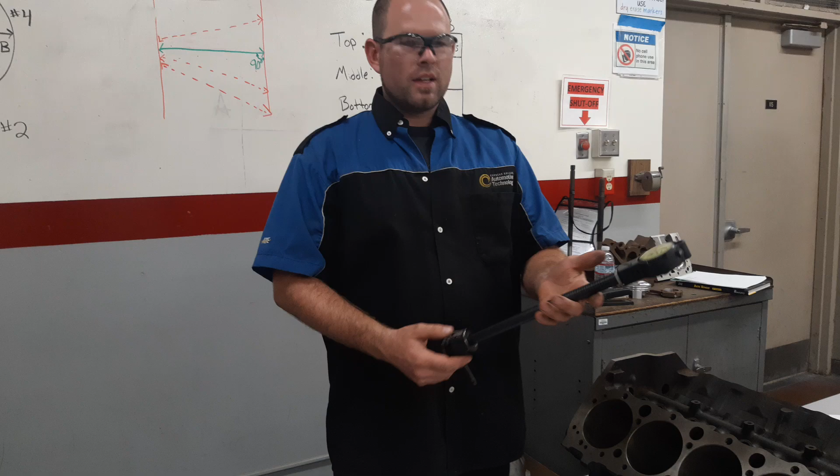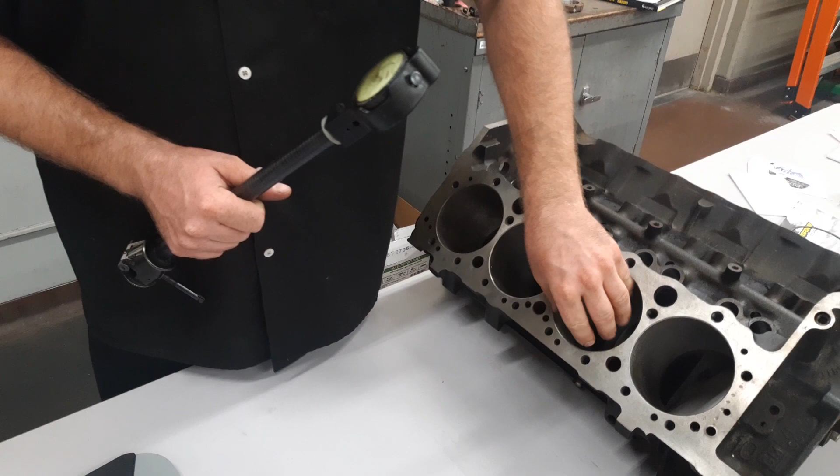Okay, we're going to cover how to use a dial bore gauge today, and not only how to use this, but also how you can use it to measure cylinder out of round, cylinder taper, and measure a few different things. So first thing is, this is kind of, I wouldn't say very complicated, but it's a little bit tricky to learn to use this. So there's a few things we should check out first.

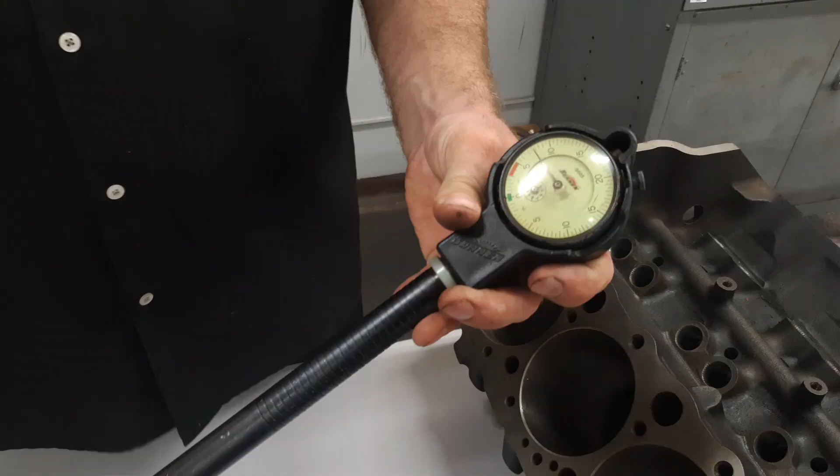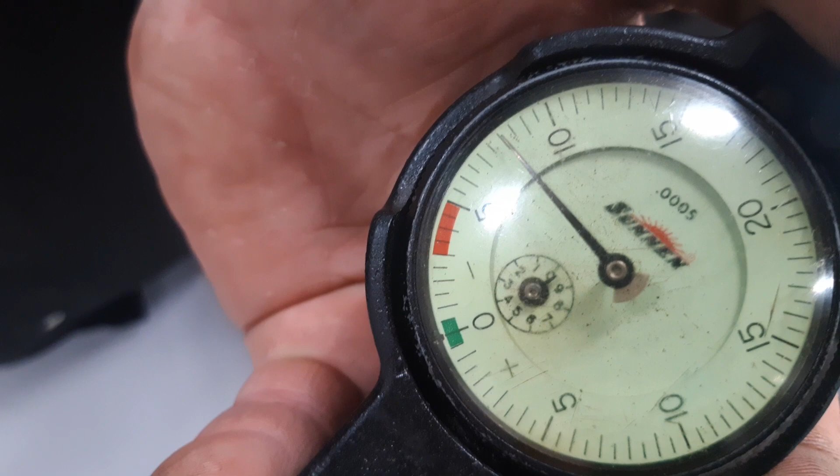The first thing is, if you watch my hand here, as I squeeze this, note that it's moving this gauge just like a dial indicator. The next thing is, if we zoom right in on the screen, you'll notice it says 0.0005. Each one of these small little lines here, I'm trying to move just one, it's very difficult. Each one of those lines is actually a half of a thousandth. So a full thousandth is going to be like the movement of two lines. It's so small I can barely even try to move like 3 or 4 lines, but just know each line is half a thousandth.

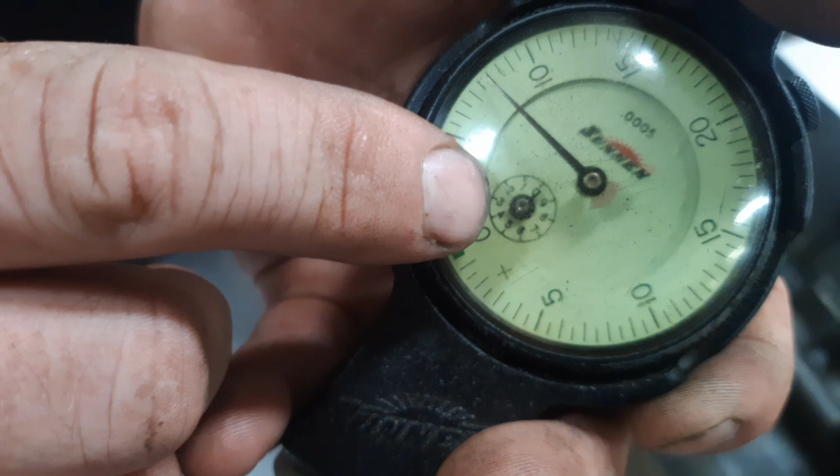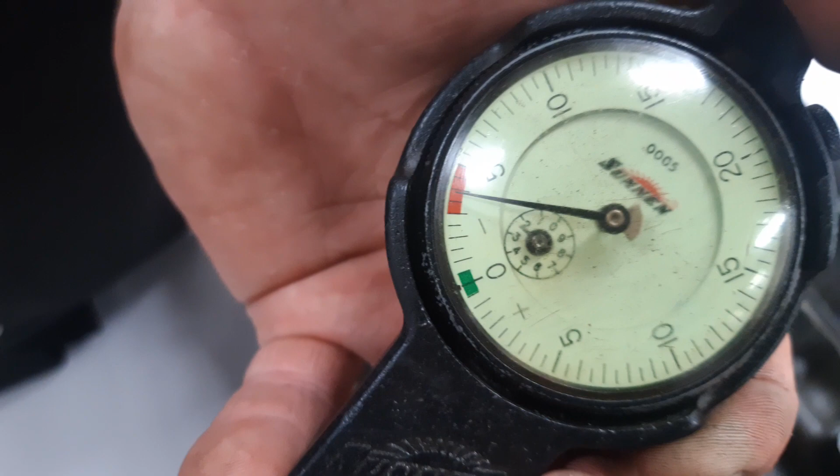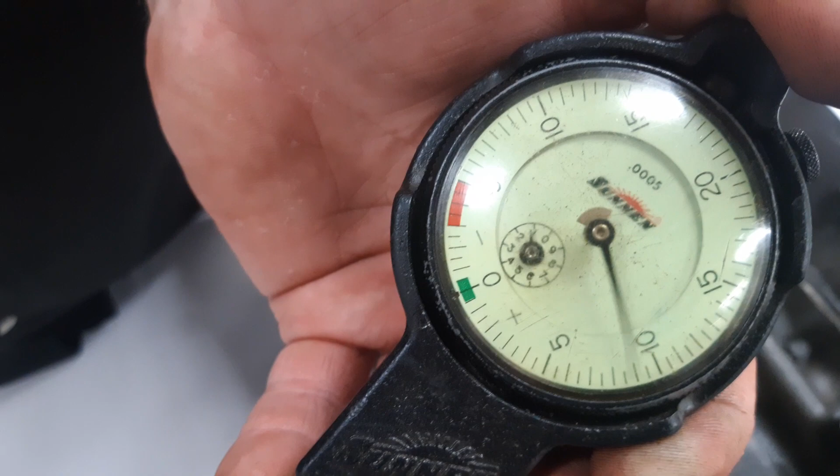The other thing to point out is this small little circle gauge here. Note that as it goes a full lap, it crosses 1. If I do another one, it'll cross 2. And so that helps you make sure that you're pointing to the right numbers, and you're not thinking, oh, okay, well, it's 0, but in reality, it's actually gone a full loop around. It's not really at 0 anymore. That's kind of like 0 plus a full rotation. So hopefully that makes sense.

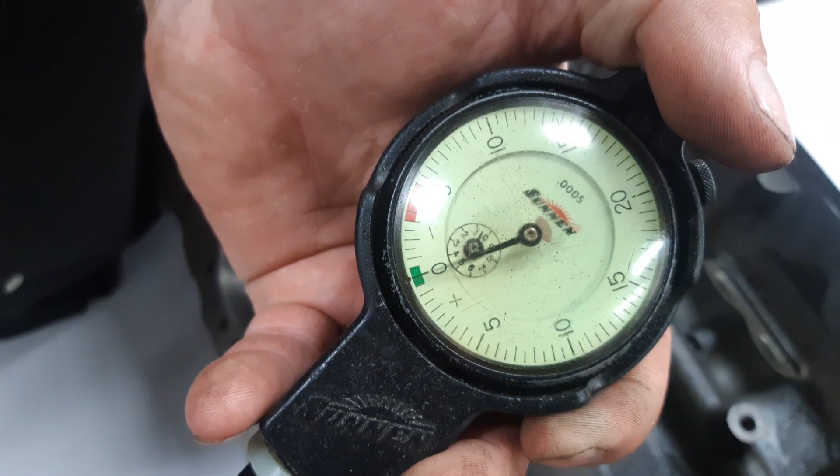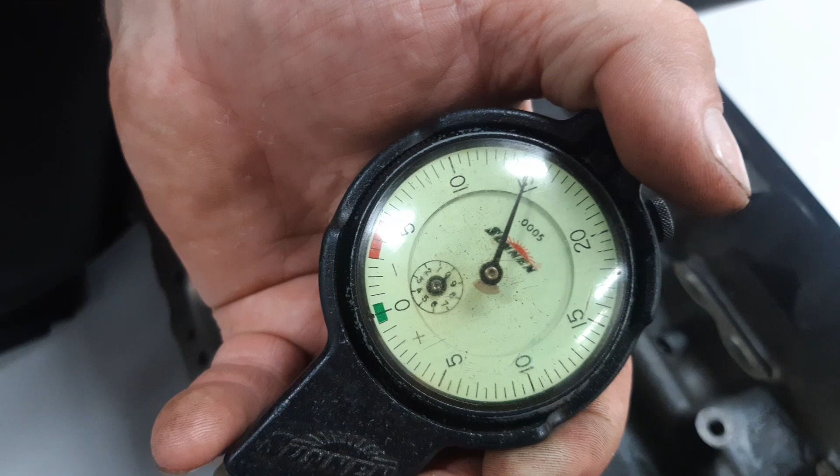The next thing is, if you're starting at 0 here, as the needle goes this way, the more it turns that way, the smaller the hole is. And the more it turns this way, towards the green, the larger the hole is. So smaller, larger, and you can kind of tell because plus is larger and minus is smaller. So that's just overall how this thing works.

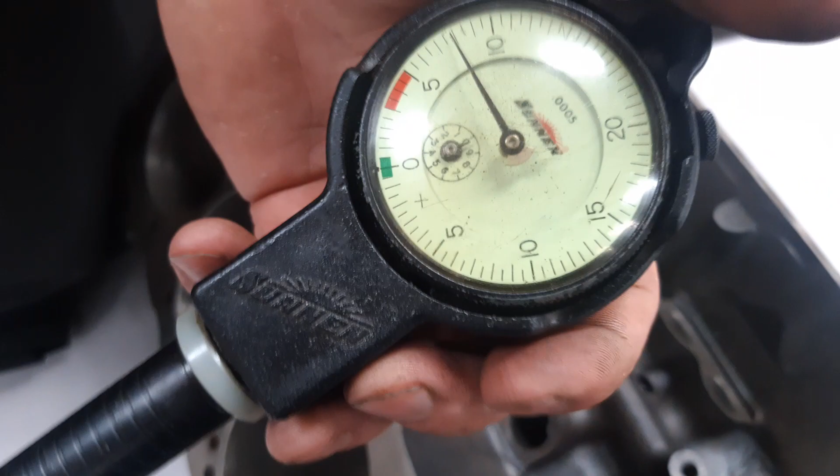The next thing is, you need to set it up to measure a specific cylinder. This cylinder was originally made to be a 4-inch bore, but it's been machined. Several of these have been machined, so they end up somewhere between 30 thousandths and 50 thousandths over. So if you want to know your cylinder size, you can look it up, and they have varying lengths of adapters, and you can do some fine-tuning adjustment on these to get it in range. So go ahead and look it up, and you can put in the right adapter. But what I do is a little bit different.

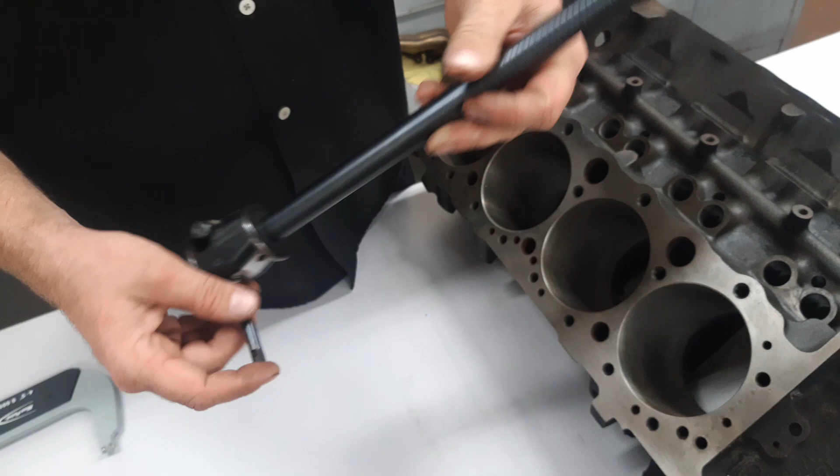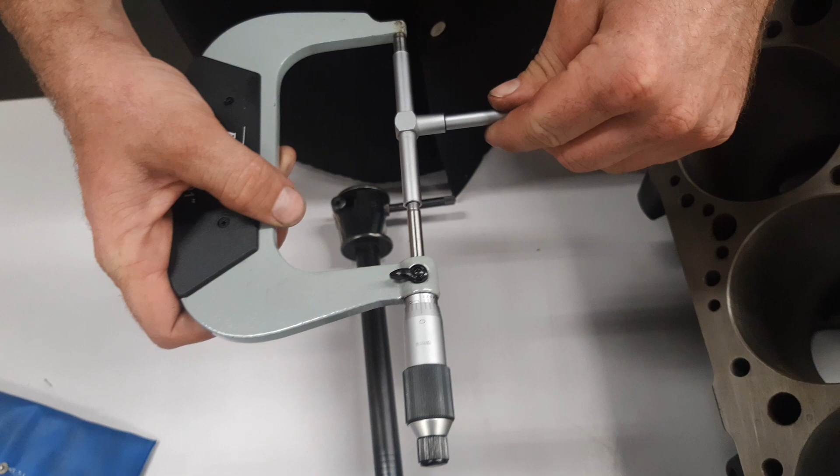I'll take a telescoping gauge just as a quick down and dirty measurement, and I'll go in there and expand it, and make sure I try to get it nice and square in the cylinder. And then from there, I'll measure that with my micrometer, and I'll pretty much know what I've got here. Because I did a down and dirty measurement, I know that my baseline is going to be 4 inches and about 50 thousandths. It should be easier for you if your block has never been machined. You would just be like, oh, it's a 350, it's 4-inch bore. I'm just going to set it up for 4 inches.

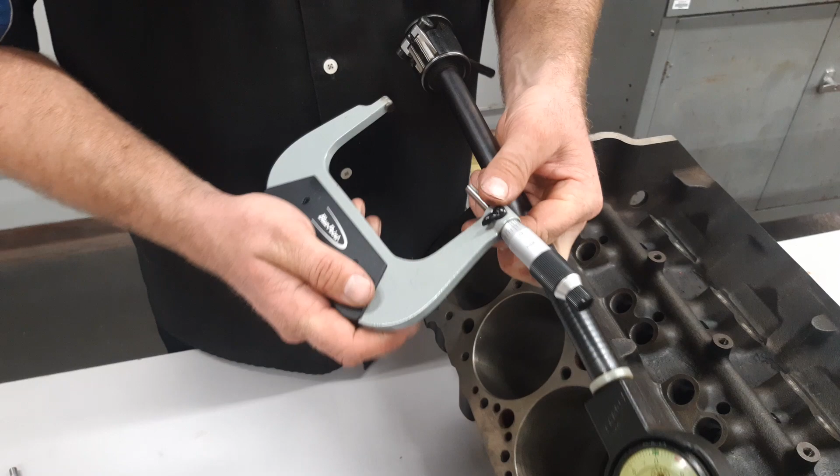What we're going to want to do is take a micrometer, and in my case, I set it to 4 inches and 50 thousandths, as you can see here. I'm exactly at 4 inches and 50 thousandths. Now, this isn't how to measure using a micrometer. I'm assuming that you know that.

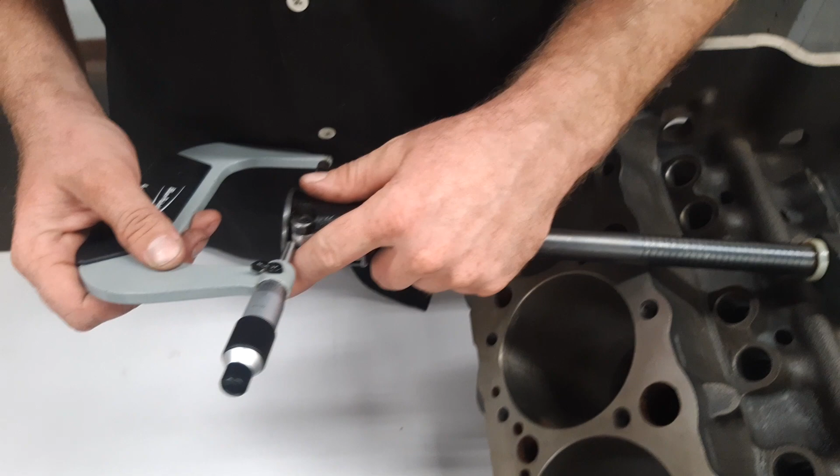But from that point, what I really want to do is lay this dial bore gauge out, and it's kind of tricky. It's really hard to hold, but I'm going to basically put the micrometer on there, and get that needle to read 0 with this set at 4 inches and 50 thousandths. So right there is my baseline. You can see that, and that's just me moving. It's hard to hold it really still. And so what that means is, if I put this in a cylinder and it comes around to exactly that 0 right there, with the small little dial behind it indicating 0, that's where we set it.

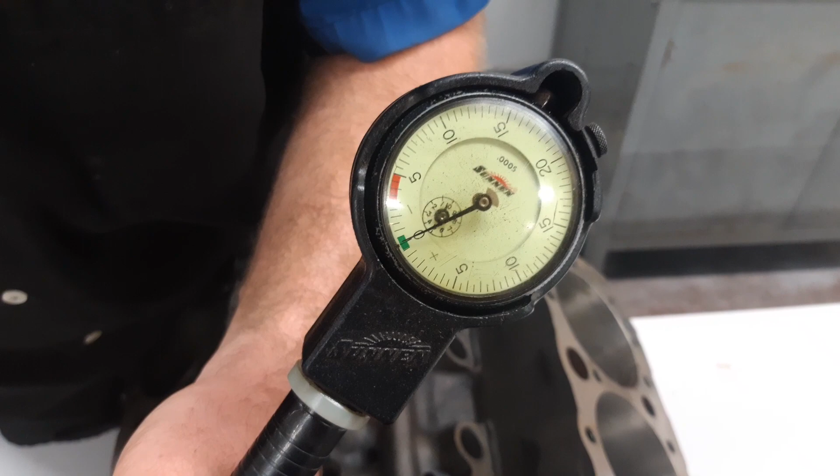If I'm right at that 0, I know that that diameter is 4 inches and 50 thousandths, because that's what I set my micrometer to.

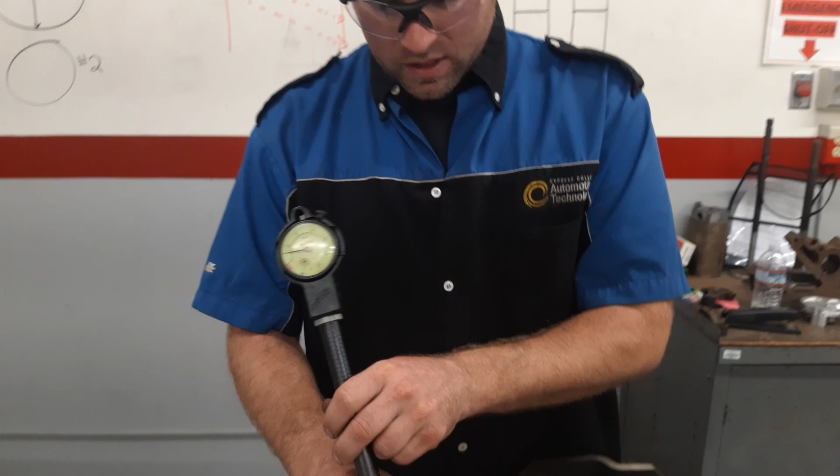Now, when I go in like this, I'm going to go to cylinder 4, and cylinder 4 for me is right here. What I'm going to do is this little sweeping motion, as you can see.

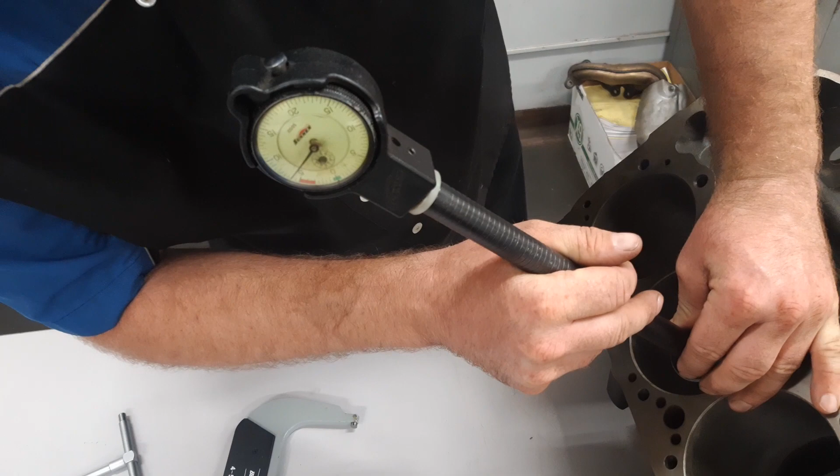Basically what I'm doing is watching that needle, and I'm trying to get that needle as far negative as I can. In this case, it's a little over, really 5.5 thousandths, but I'm going to use 5 just to keep the math simple. So we'll say that's 5 thousandths of an inch.

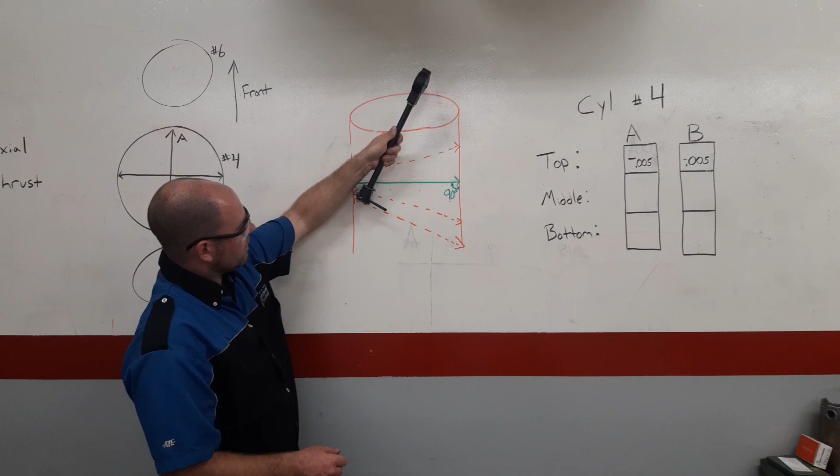You'll notice the further I sweep, it goes kind of back down towards the bigger hole side. The reason we're doing that: I've drawn here, we put this in and start with a sweep, and the more we tip it out of being perfectly square, this line gets longer and longer, showing more and more on the dial indicator towards the green, which is the larger side.

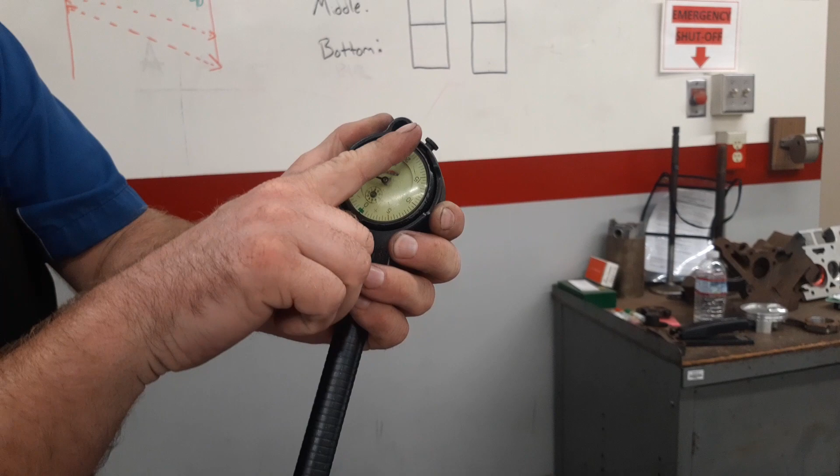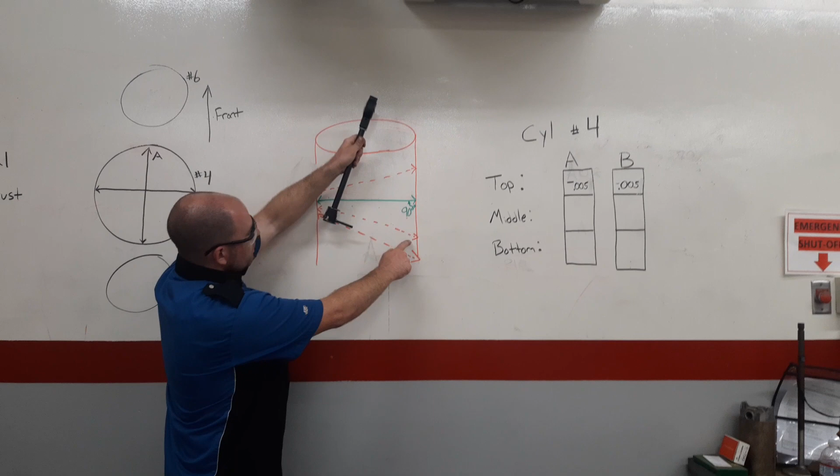So when you start in, it starts way over here, and as you're sweeping it, it gets tighter and tighter, smaller and smaller. As I start sweeping, this line gets a little bit shorter. The shortest the line will ever get is at the true 90, the true perpendicular. That's our real measurement. Once I pass that, you'll notice it starts to get longer and longer again.

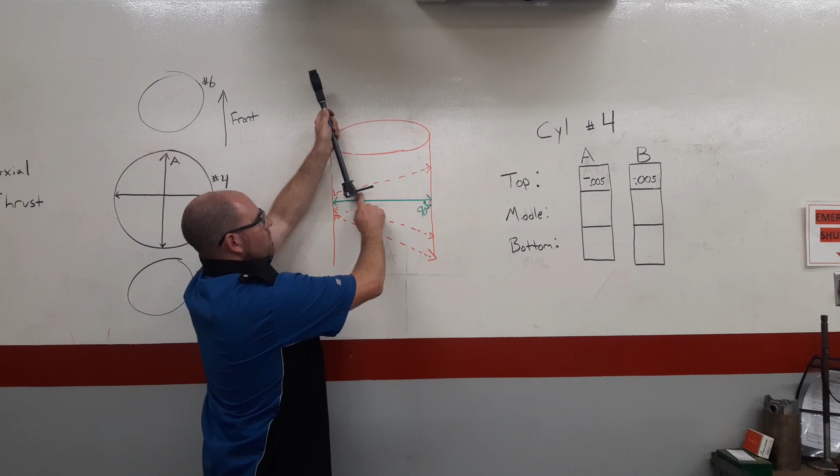Let's see what that really looks like. If I'm in here and I start my sweep, this is showing a really, really big hole. It's getting smaller, smaller, smaller, and then it starts to get larger again. Smaller, smaller, smaller, larger again. So we're just looking for that smallest spot.

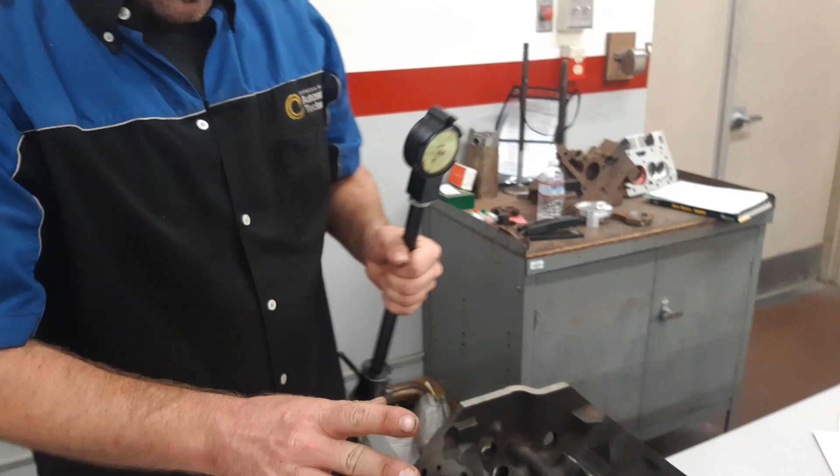For simple math, because we're not going to try to crunch 0.5 thousandths, let's say we've got 5 thousandths of an inch. Now the measurement I just did is in the axial direction.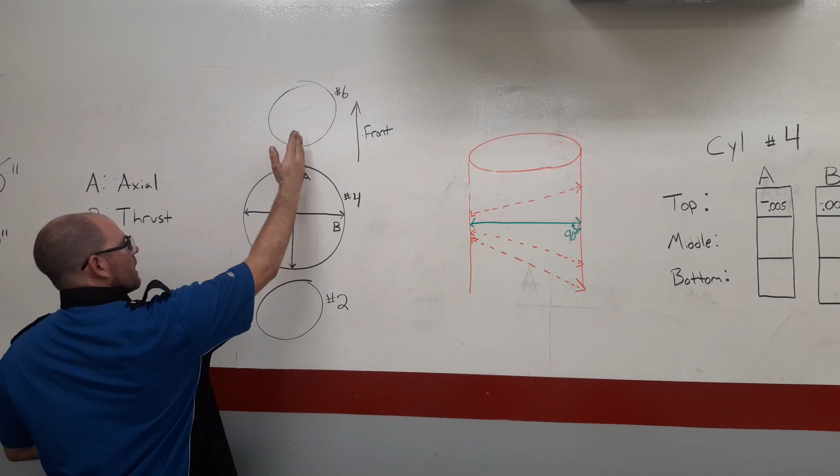Over here I've got cylinder 4 drawn. The axial direction is along with the crankshaft, so I've made that my A dimension. This is my A measurement, it's axial. I've made a little chart here.

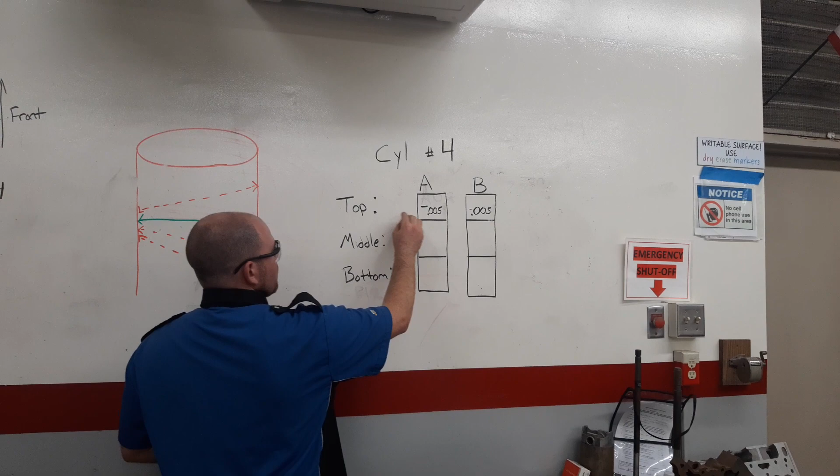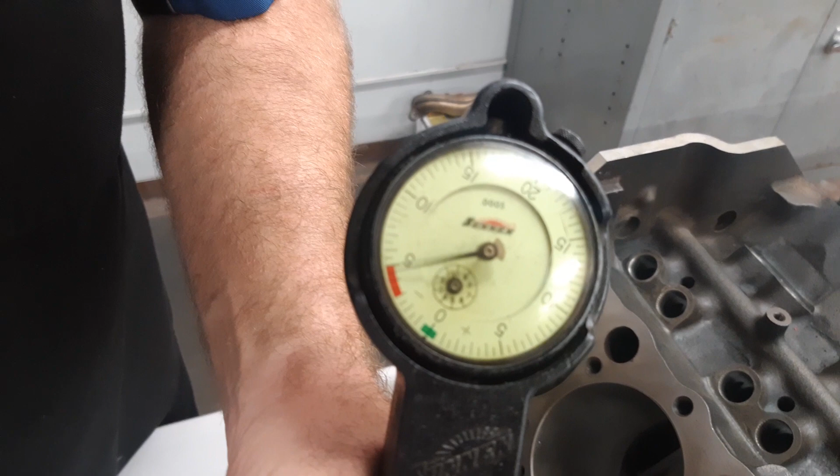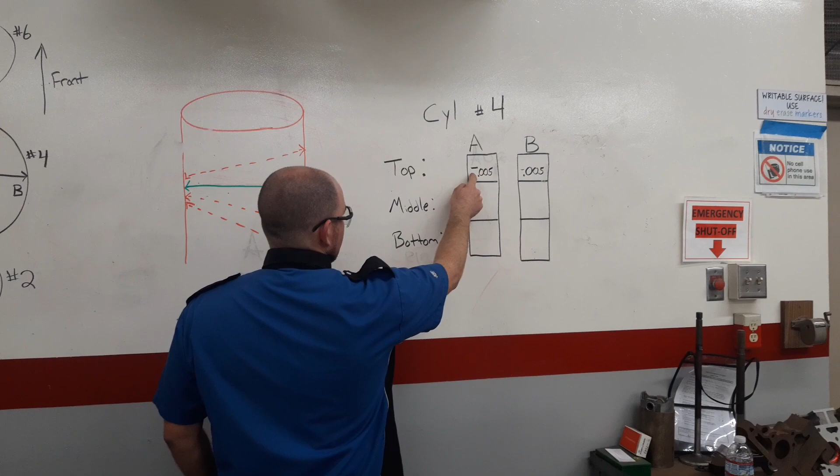We just measured the top of the cylinder, and I'm getting what I consider a negative 5 thousandths of an inch. Why it's negative: if you look here and remember, we were right around there, and that's on the negative side. So what negative means, very simply, is it's a smaller hole. If it's negative, it's a smaller hole. How much smaller? 5 thousandths smaller.

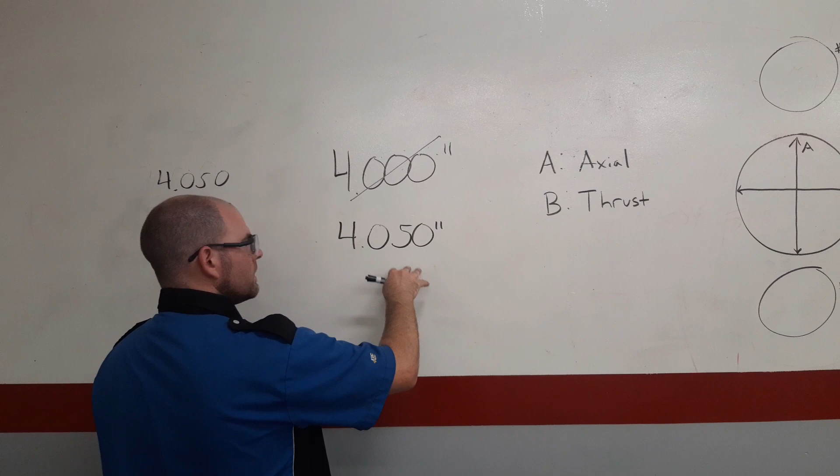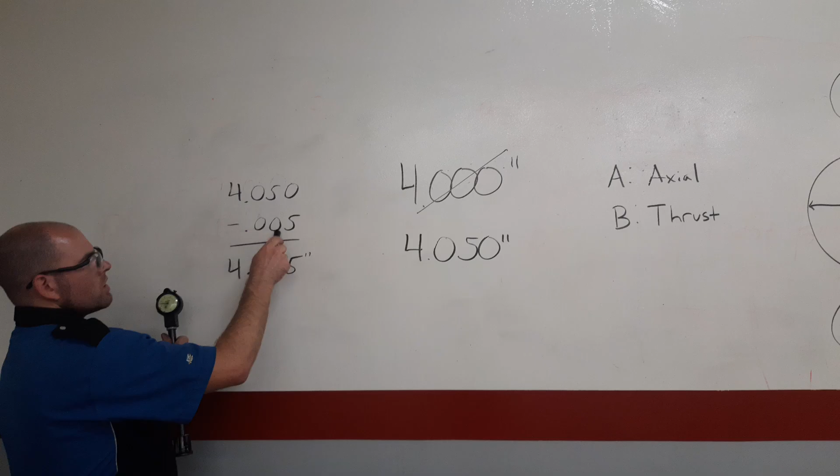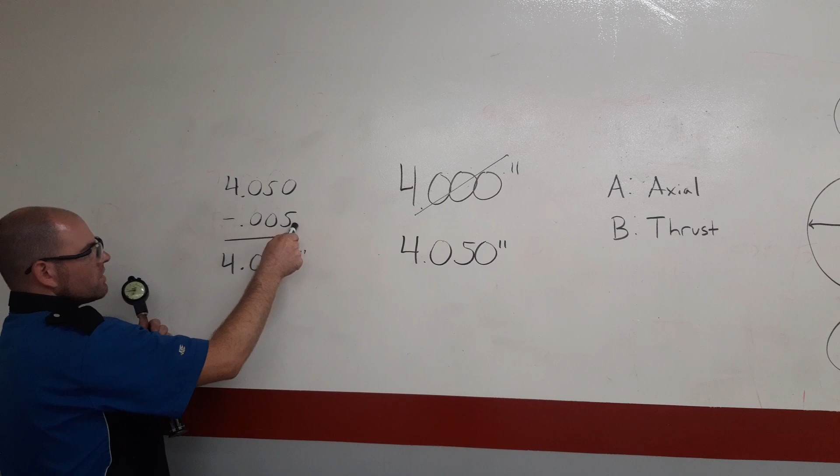So if we have a base setting to our 0 at 4.050, 0 really means 4 inches and 50 thousandths. We start with 4 inches and 50 thousandths, then subtract what our dial bore gauge indicated. The dial bore gauge indicated you're 5 thousandths tighter than the 0. So we do 4 and 50 thousandths minus 5 thousandths, and we get 4 inches and 45 thousandths. That's the actual diameter in the axial direction at the top of that cylinder.

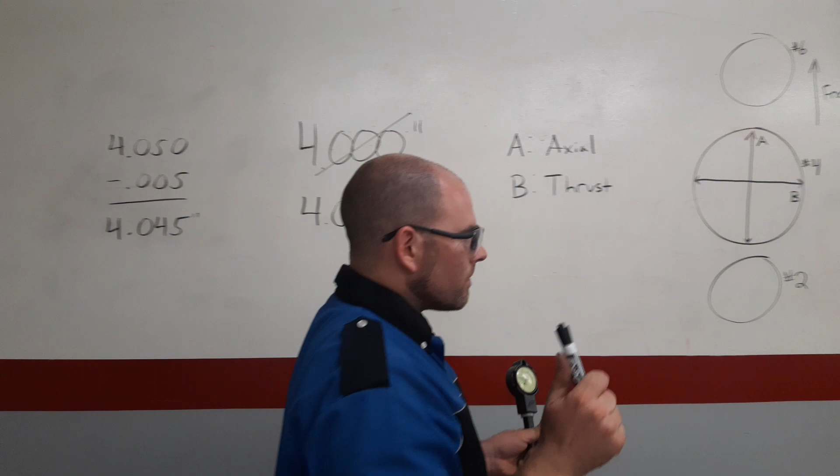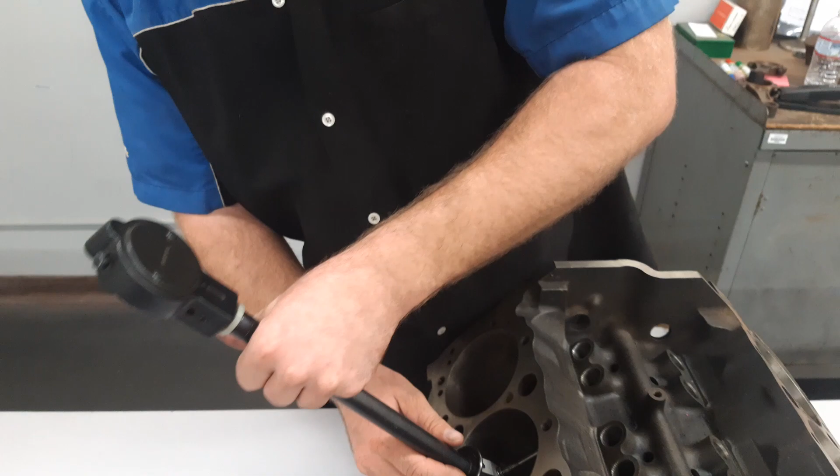So what we would do next, once we set this, it's set for all of our cylinders, assuming they're about the same. We could go back in that same cylinder, but this time, I'll face it upward. This time, I'm going to go in the thrust direction.

So note, here it comes around and around and around. You know what? That one actually looks like we show a 6 thousandths on that. Interesting. Can you see the 6 thousandths there? It's not 5, that's right at a solid 6, which is interesting.

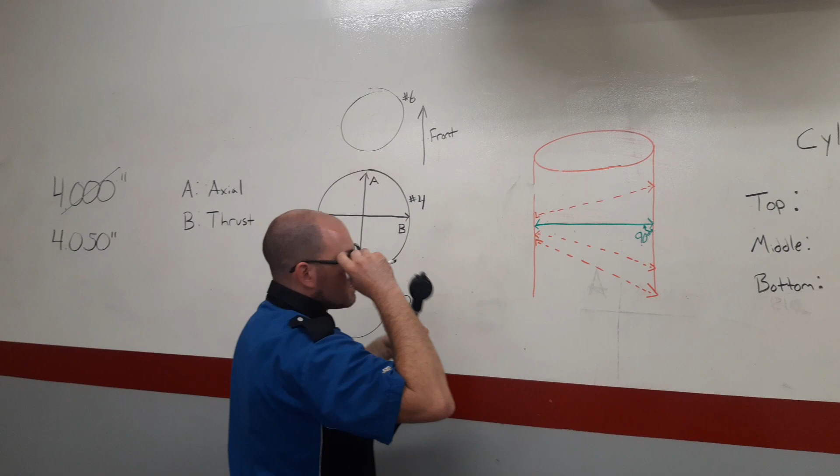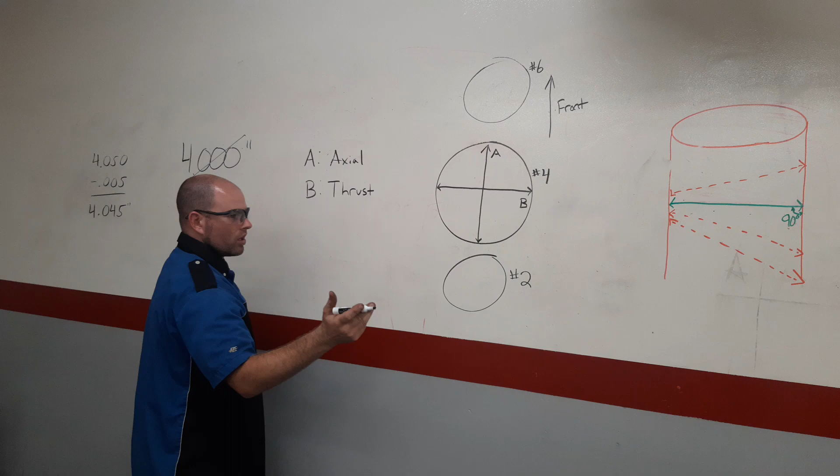I was anticipating 5. So if we have 6 thousandths on that measurement, remember B being the thrust measurement, it's more like the way that the rod is going to move when it's going up and down. If we have 5 thousandths in A and 6 thousandths in B, what that tells us, a difference between A and B means—this is cartoon exaggeration—that we have a cylinder that was more like...

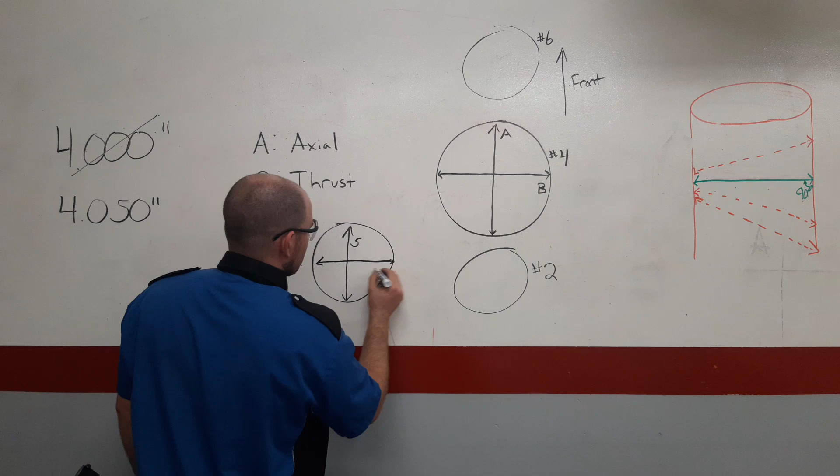...let's say 5 on A and 6 on B. It's out of round. This cylinder is currently out of round.

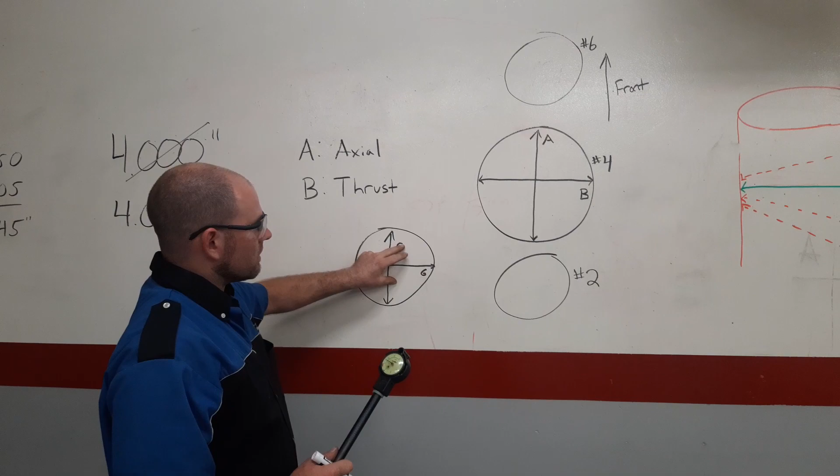Now, how out of round is allowable depends on your specified service information, but the idea is the same. Technically, based on our measurement, this cylinder is slightly larger in this thrust direction. So this just told us that.

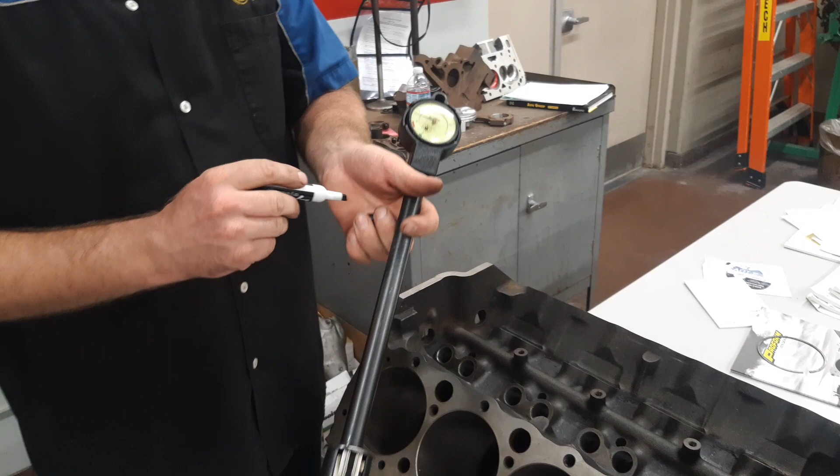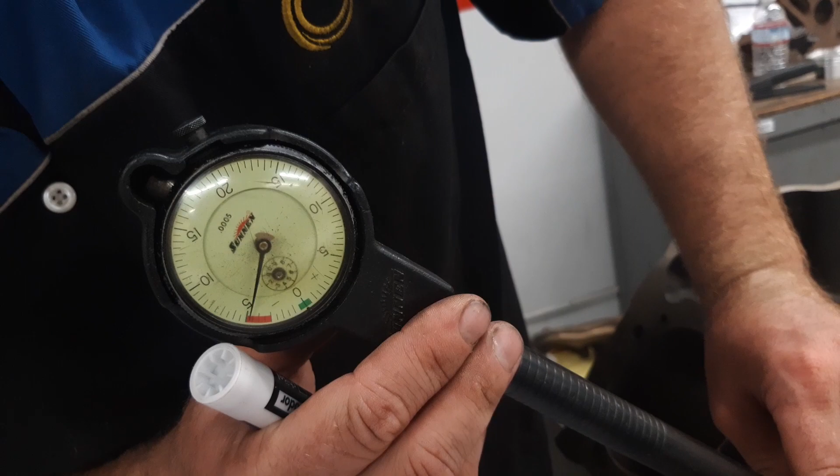Now the next thing we're going to do is top, middle, bottom, but I'm going to run through them pretty quick. I'm going to start in the axial, right down to about the middle of the cylinder. I can sweep pretty quickly now, and I'm showing pretty much a 6 on that. So that's a minus 6 thousandths.

Okay, now we're going to go again in that thrust direction at the middle. I'll face it upwards here. So we're at, you know, I really only see 5.5 thousandths there. I'm going to call that another 5 thousandths.

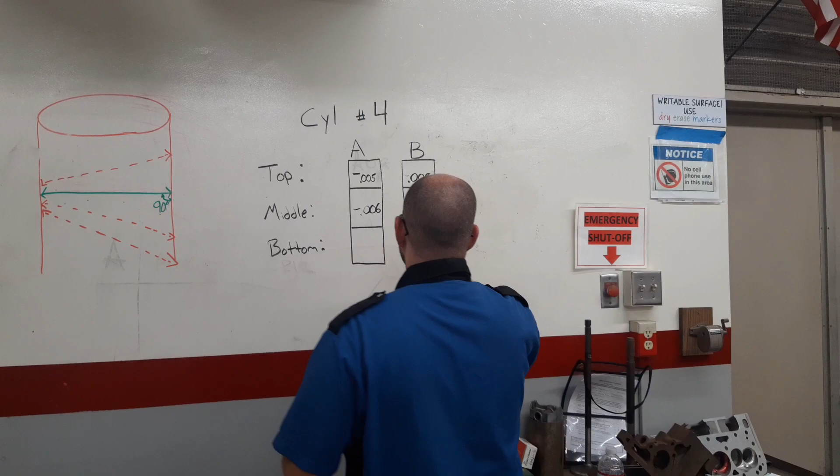We're purposely going to make this one a little bit all over the place in the interest of math. Now we're going to go ahead to the bottom. I'm going to go in the axial direction. Typically the bottom of the cylinder is known to be a lot of times the tightest, but this one was bored. This one's definitely at 5.

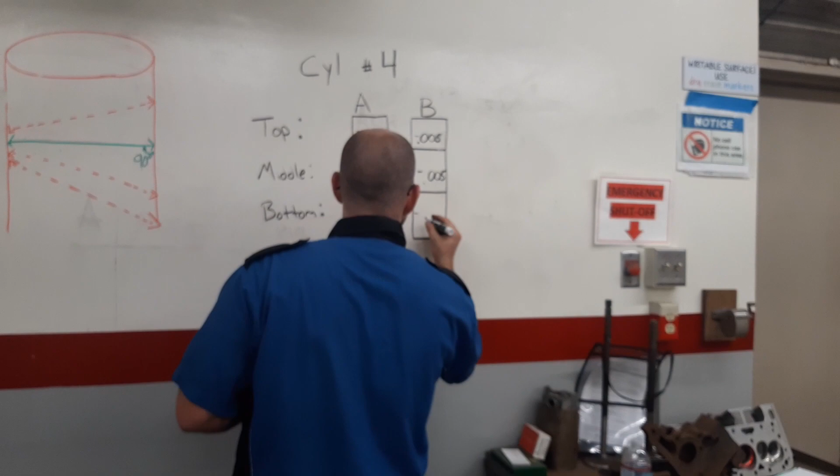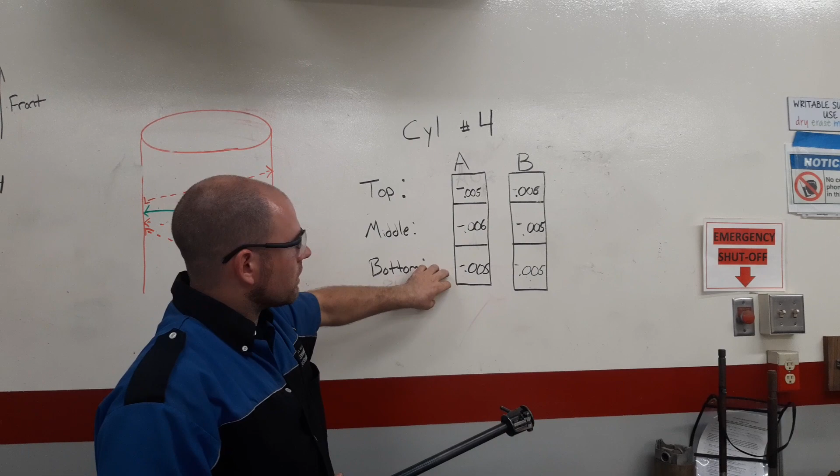And in thrust. Yeah, that one's right there really at 5 too. And I did round down a little, I did see that. So what we could say is there's a bit of out of round here at the top, a bit of out of round at the middle, and really it's actually really round at the bottom.

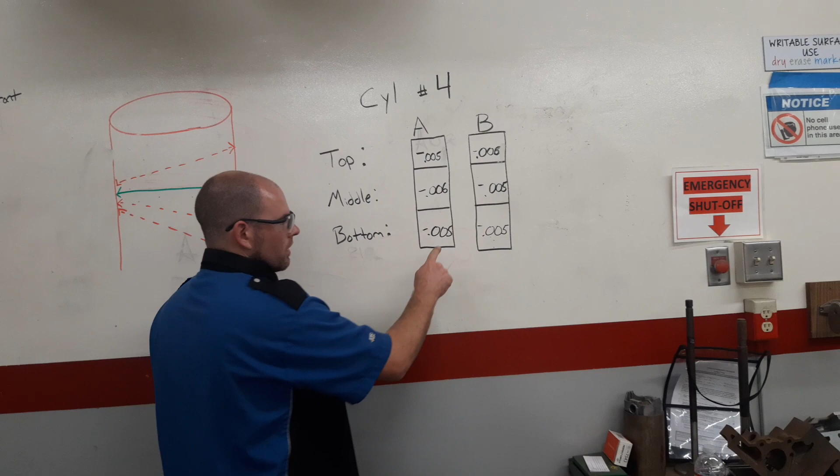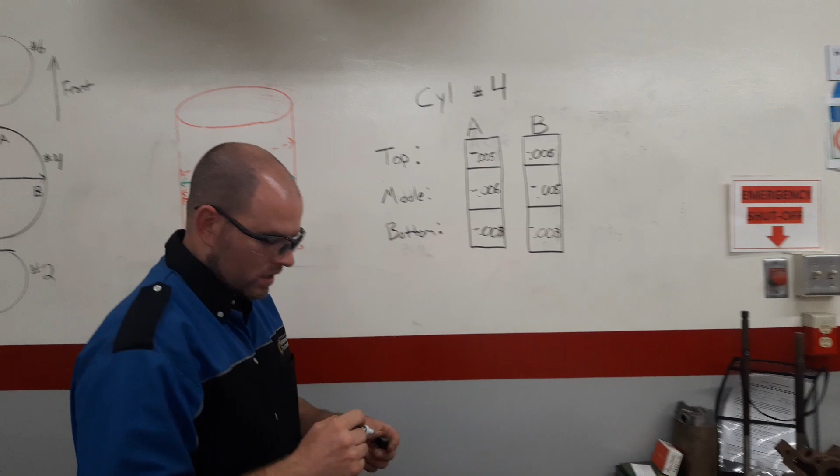And so I'm going to change something just to demonstrate what this could have been. Let's just say that we got these lower numbers here at 3s, okay? Let's say we got an honest measurement of 3 thousandths. Now this has been machined, so I'd expect pretty darn near perfect. So let's say that we had measured 3s.

Now the top and the middle show a little bit of out of round. The bottom has no out of round. It's perfectly round. But here's the point.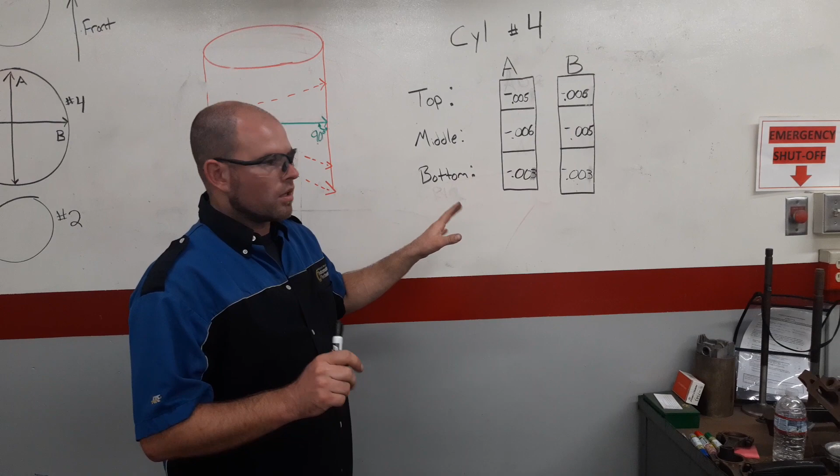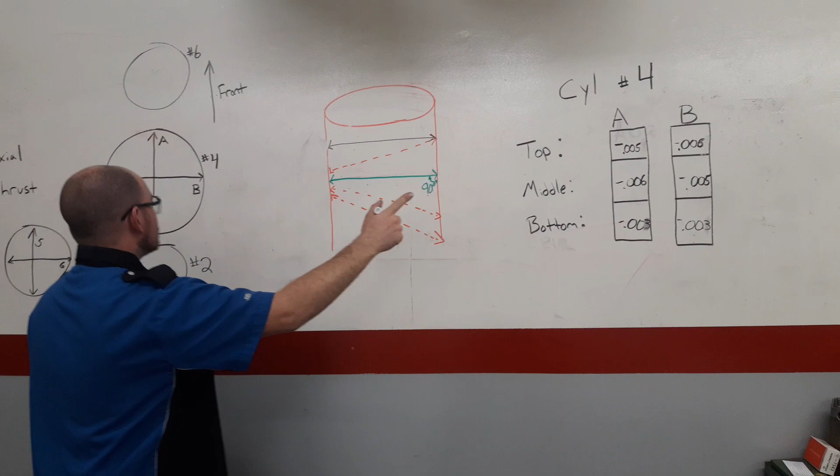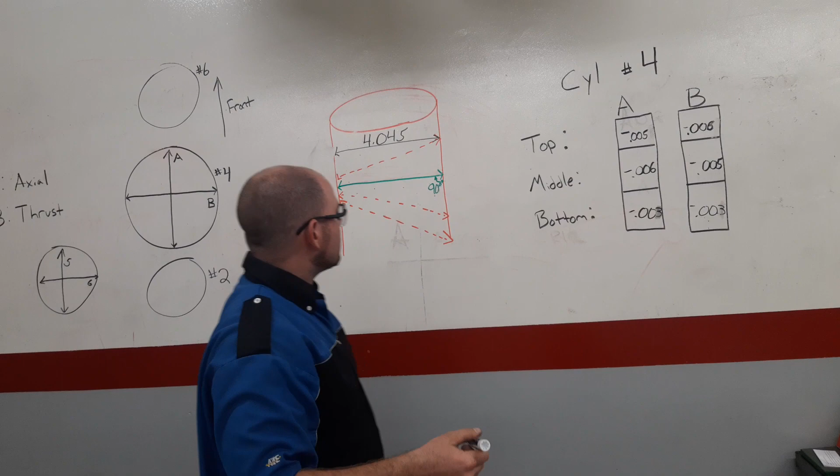If you're looking at top to bottom, we're going to draw some new lines here. If top to bottom, our measurement, as you'll remember, was 4.045. Okay? 4.045 was our measurement. And, you know, technically we could even make it 4.044, but in fact we will, because it was really an honest 6 thousandths under.

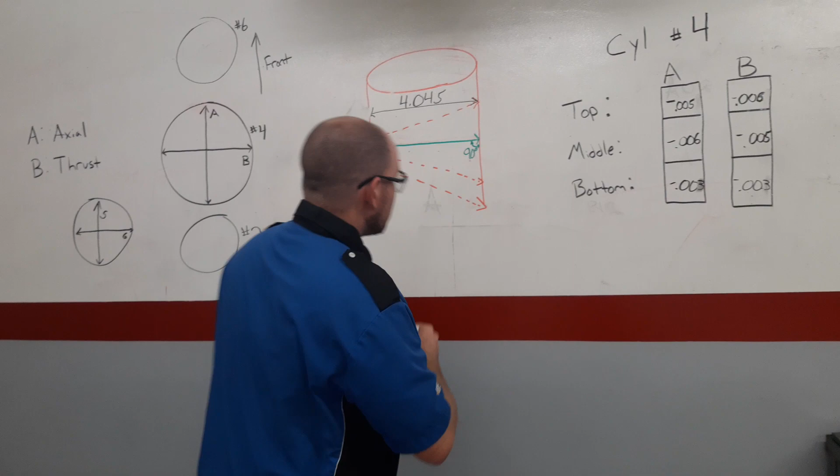And so we're going to go with 44. I'll erase up my finger here. We'll go with this number. We're going to judge it as harshly as we possibly can. We don't want to do it any favors. If 6 was the tightest, let's go ahead and use that.

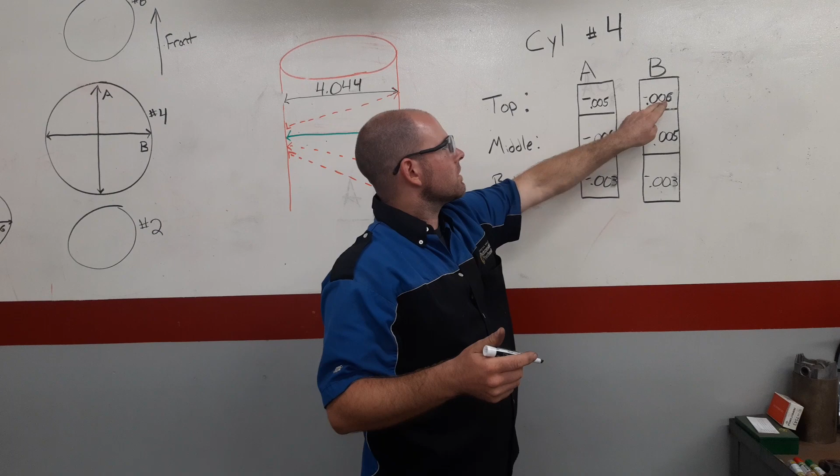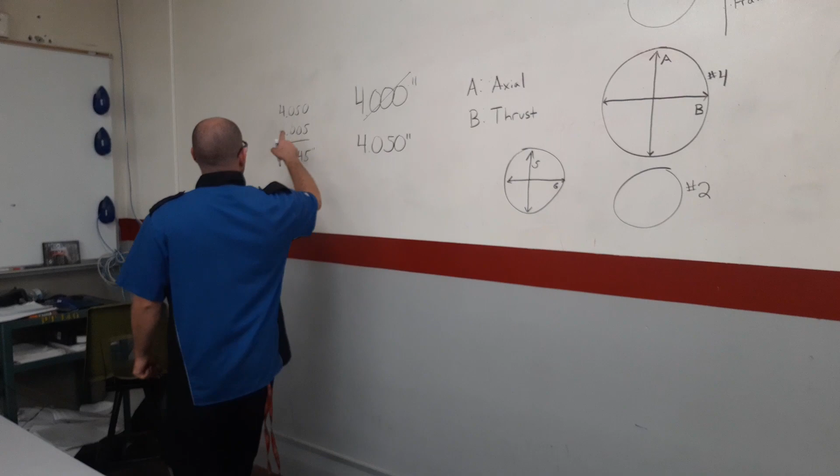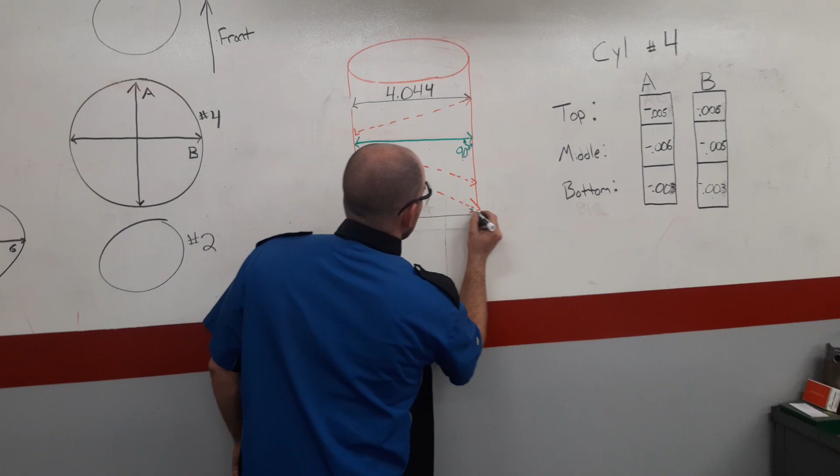And then at the bottom, let's just say, this would be kind of backwards from typical, but at the bottom it's 3 thousandths under. Let's do this math really quick. If it's 4.050, but it's 3 thousandths under, that's going to be 4.047. So the bottom would be a 4.047. No problem. This is perfectly round.

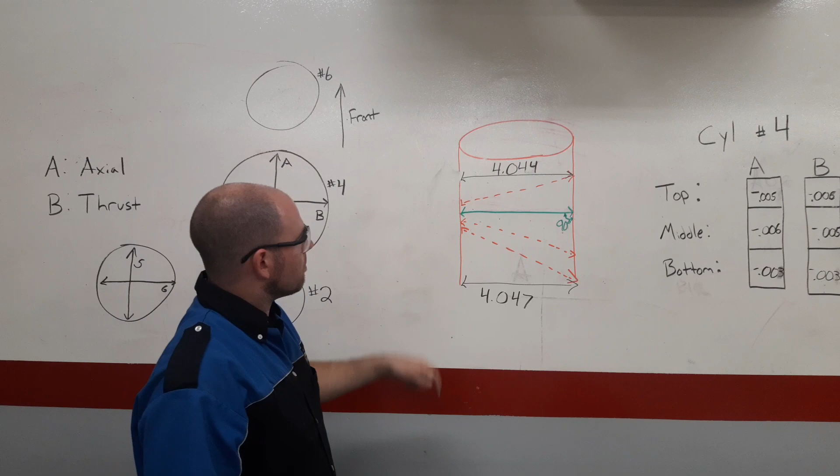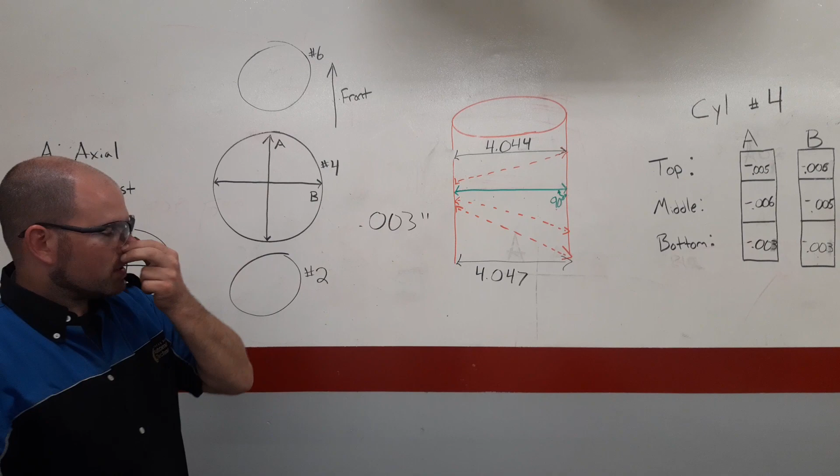However, look at the difference between the top and the bottom. We got a bit of an issue here. The difference between the top and the bottom, quick math, is 3 thousandths of an inch. There's taper on this cylinder because of the difference between the top and the bottom.

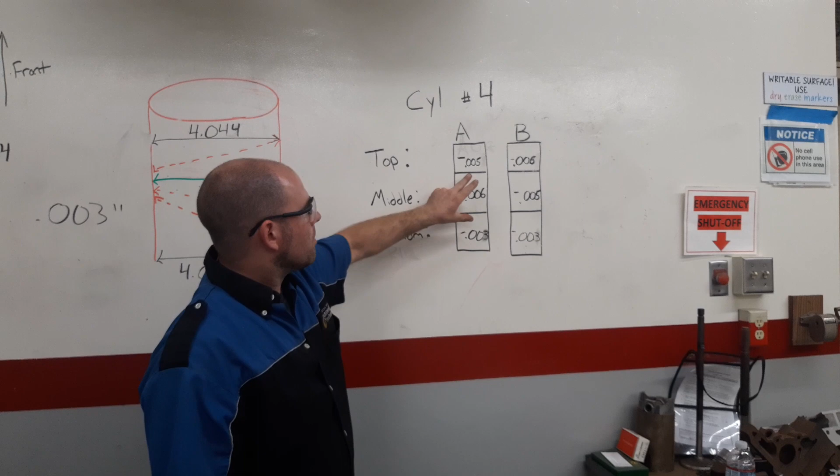Now, a small note. If it was the difference between these two, we'd say there's only 2 thousandths taper. But again, we want to judge it as harshly as we can. So there's actually a bigger difference between these two. So let's go ahead and make that 3 thousandths taper.

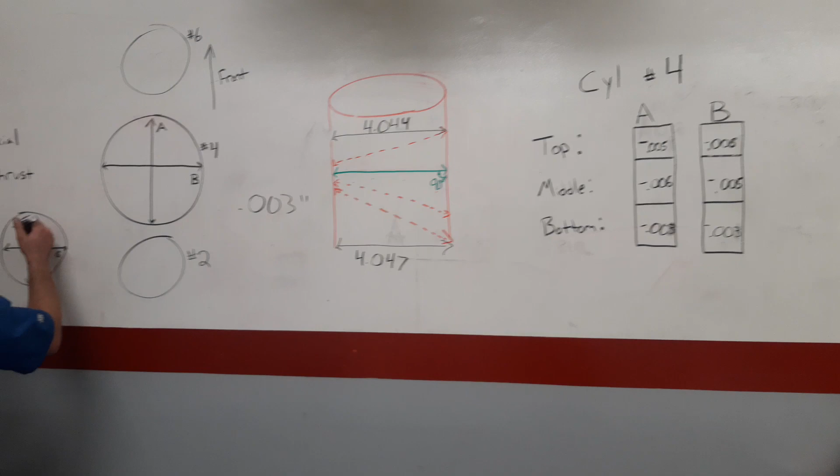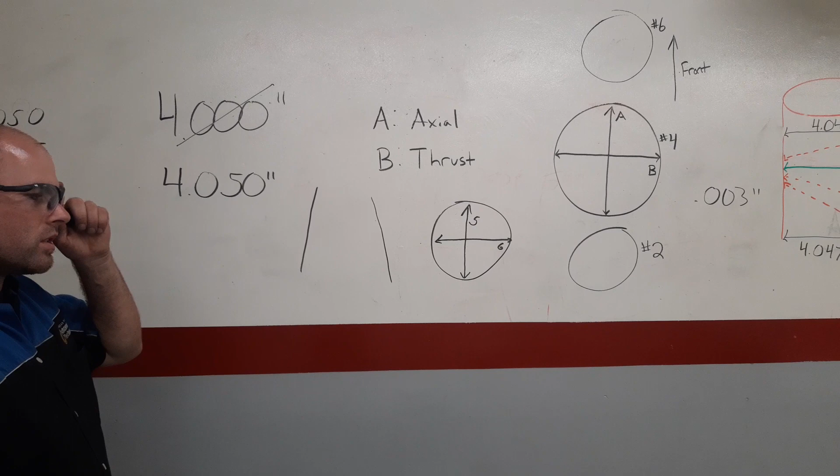What that would look like in a cartoon way is if we had the cylinder here, it would actually taper down like this. Now that's totally exaggerated. And that's, you know, if it was like that, that'd be kind of backwards. It's typically the top that would be sort of opened up because that's where there's more thrust action when the compression's getting really high and everything. But the concept is still the same.

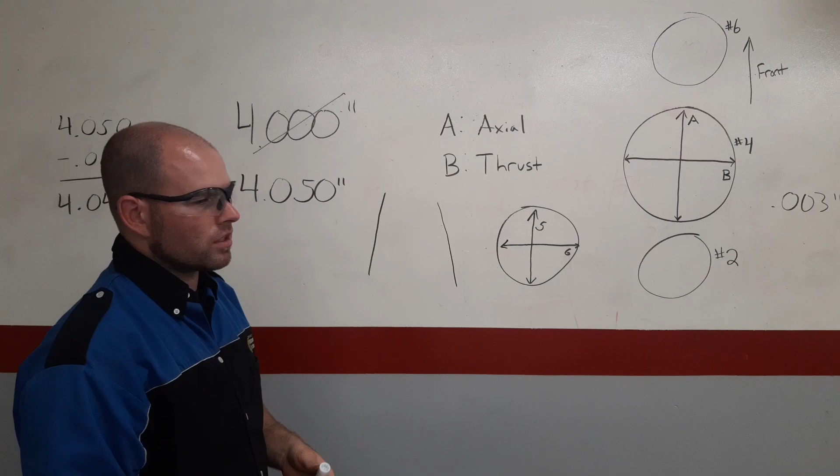So if you could use this tool effectively, you could go ahead and make a quick chart and go, okay, we're 4 under, we're 5 under, we're 4 over, and just basically use that baseline and do some quick math. This tool could really help you out. So hopefully that helps explain everything, and hopefully it helps you do what you're supposed to.